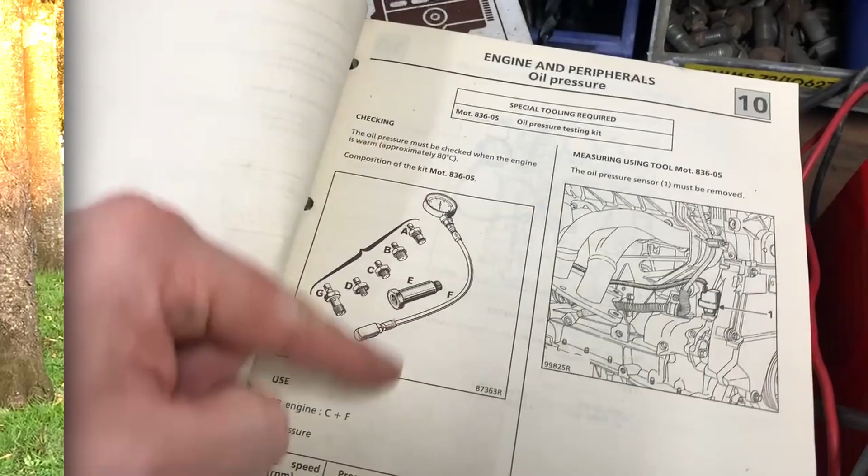Well, this is annoying. I done all that work with the cylinder head, and it was all looking good. The oil pressure was fine until it got up over 100 degrees coolant temperature, which I don't know what the oil would be then, might be a little bit higher after a good while running. And the oil light flicked back on when it was back down at idle, so no better off with that cylinder head, unfortunately. Which is really annoying, because now I just feel like scrapping this car.

However, I'm lucky I didn't film yesterday when that happened, because I was in a right paddy. I did get some video footage of the light just to record it really happening. But I was mega unhappy about it, and yeah, I didn't film anything because I was just sulking.

But overnight, I've had a bit of time to think, and after having a chat with a few people on cliosport.net, quite handy people over there, really know their stuff, particularly when it comes to the F4R, which is the newer version of the F7R that I've got. And they mentioned the oil squirt jets often stick on the F4. So I thought I'd check the oil squirt jets on my engine, being as it's the only thing on this engine now that hasn't been changed. It's simply the only thing left that it could be.

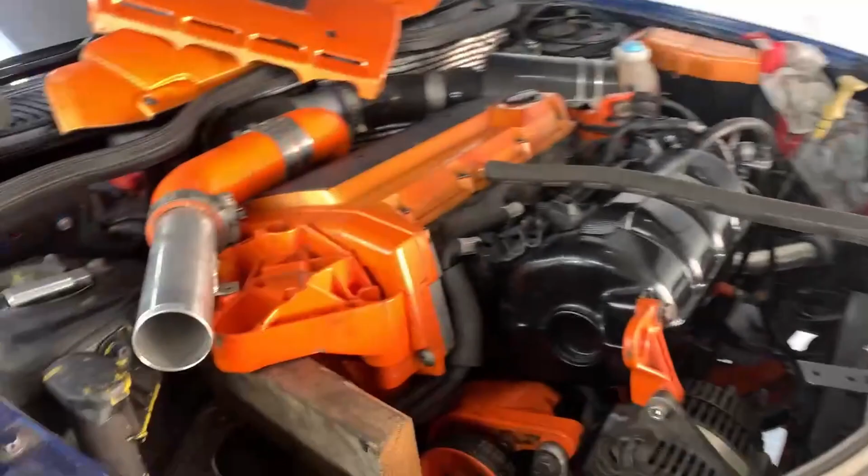So that proves that they are valves. So guess what I've just been doing for the last 2 hours? Let me show you. Here is the engine, propped up with a bit of wood because I need it up higher.

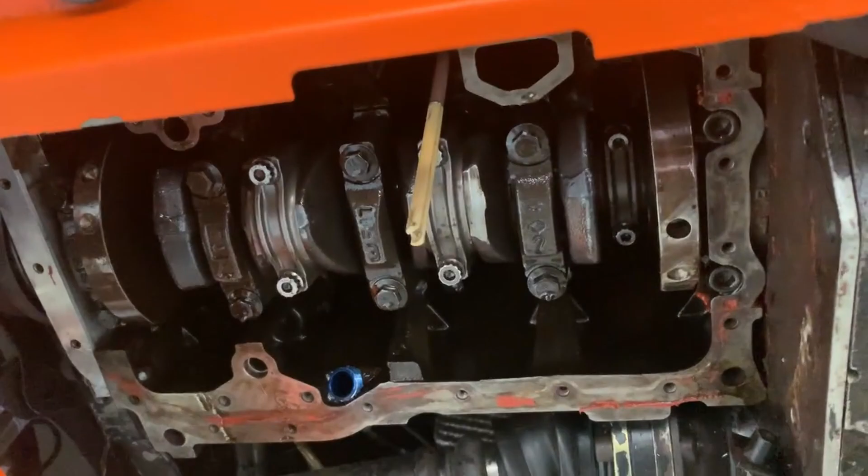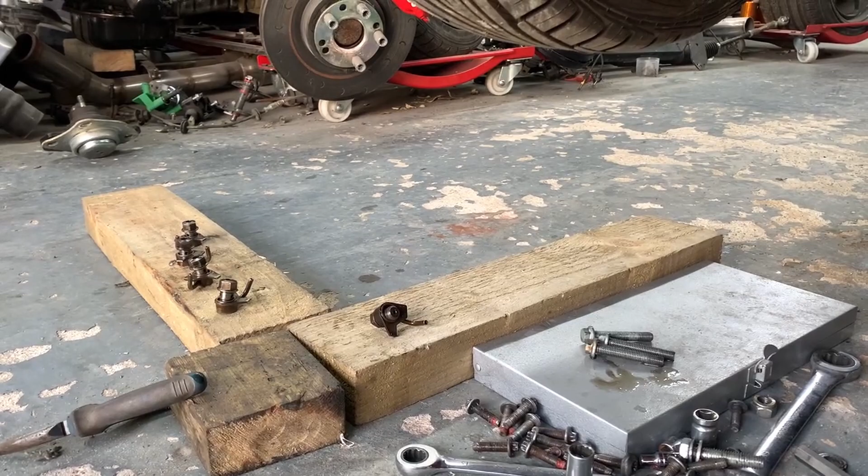Because underneath we've got the sump off, and I've actually taken all 4 of the under piston squirt jets out. That's the spare one from the spare block. And what I found is basically my problem. So, and don't do this, it's minging.

Here is the oil squirt jet off the engine that had good oil pressure. Yuck. And here is an oil squirt jet off the problematic engine. So, there's my problem.

Ew. And 3 out of 4 of those jets on the problematic engine were like that. So, yeah, it's safe to say I think I found my massive oil leak causing my low oil pressure.

So what I'm going to do, I think, is put the 4 good ones, or supposedly good ones. I'm going to find 4 good ones, basically, and put them in this one, seal it all back up, and see how it goes. Fingers crossed, this is the last time I strip this engine apart.

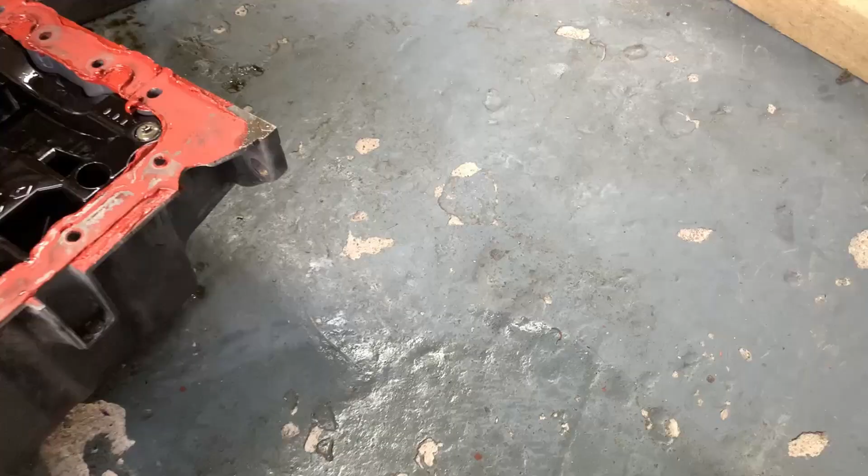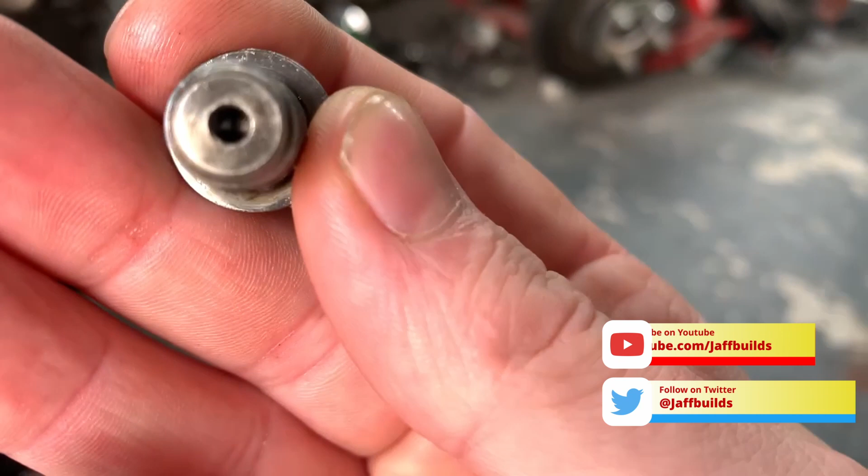Taking a closer look at these jets, or at least the banjo. So there's the jets. These are the banjo that goes through it. And inside, it's really difficult to see. Can you see that there's a piece of metal? I'll put something on the screen so you can see it. There's a piece of metal in there, holding it open, I think. So that would be the issue.

Right, that change of oil squirter jets seems to have done the trick, at least enough to keep the oil pressure from dropping low enough to put the light on, which is the only metric I can really go by at the moment. But what I'm going to do now is start it up, get it warm, as warm as I can.

I think about 103, 105 degrees coolant temperature, because that's when it started getting upset with me last time. So if we go up to about 105, get the fan to come on so it cools it back down. It's pretty good at regulating the temperature, so it'll go up to 105 and then drop all the way back down to about 85, or even lower, depends what I set the fan to go off at. But it's quite good at regulating the temperature, so the coolant system seems to be working properly, and that is cooling the oil down enough to keep it viscous enough, I guess. So yeah, I'm going to start it up.

I've got the F7R manual from Renault in the garage, up in the corner somewhere. But I think in there it says something like 2,500 RPM, you should get 2 bar of oil pressure. I've got the internal gauge hooked up, I've got the mechanical gauge hooked up to the front. So we'll set it up at 2,500 or 2,000, whatever the book says. Check what the oil pressure is. If it's good as far as the book goes, it's good as far as I'm concerned. So we'll just start it up now and see how it goes.

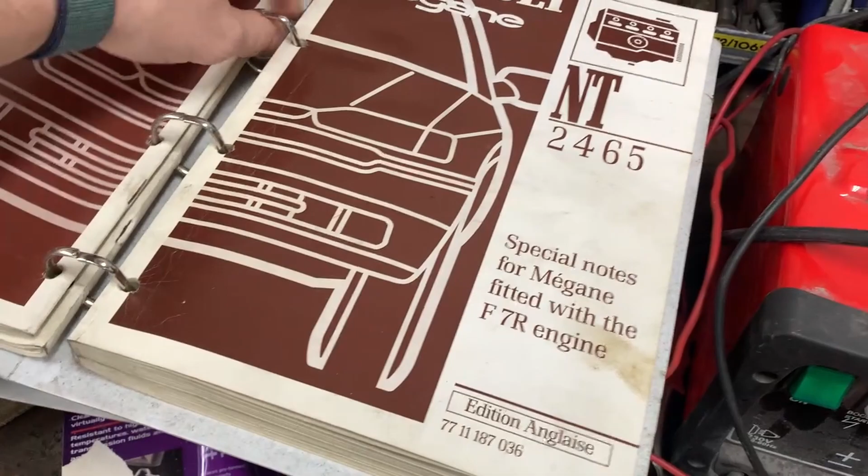Right, here they are. I got them from the corner over there. Here's the official Megane documents from Renault. I don't have an F8Q turbo diesel engine, I do not have driver's seat memory, but I do have special notes for Megane fitted with the F7R engine. So this is the one I'm interested in, and here's my bookmark.

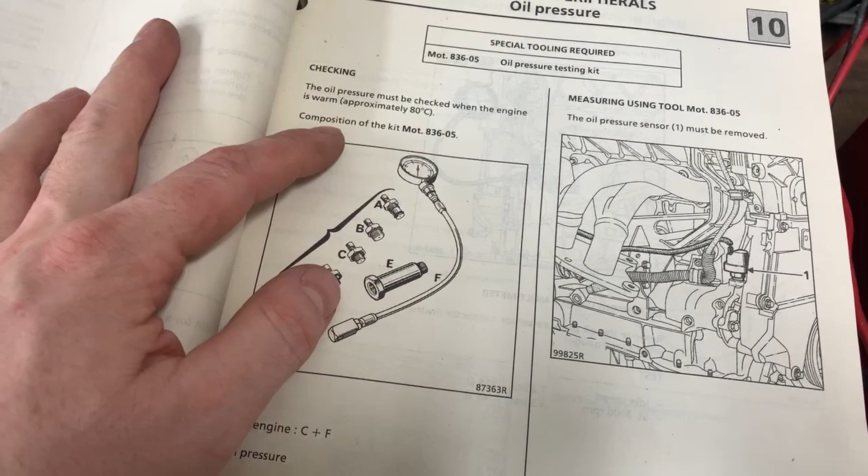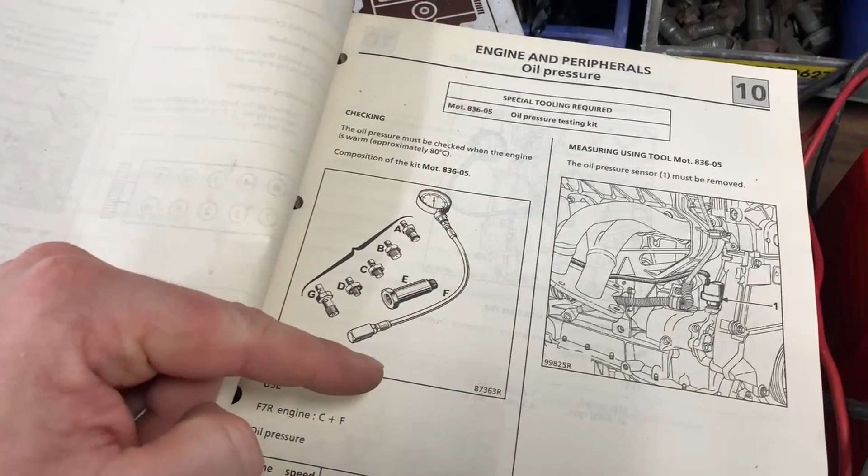Here's what it says about oil pressure testing. Oil pressure must be checked when the engine is warm, approximately 80 degrees. Well, my oil temperature is like about 95, so it's above this. So if the pressure is lower, then we're still okay-ish, still not ideal though. It says at idle speed we should have 1.2 bar.

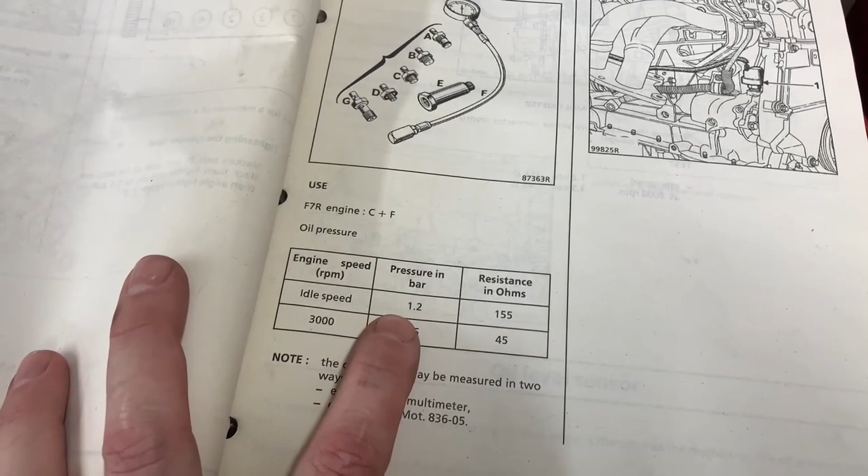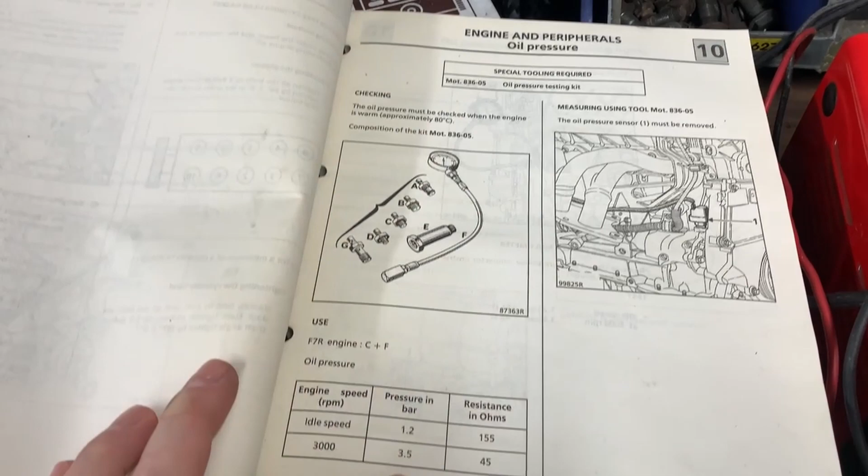I think I'm getting just over 1 bar. So it's close, kind of works out actually if we're at 80 degrees and I'm at 95. So if we're at 80 degrees it should be 1.2, and I'm at 95 and I've got a little bit less. That would make sense. And then at 3,000 RPM it should be 3.5 bar in pressure, and I think I'm only at 3.

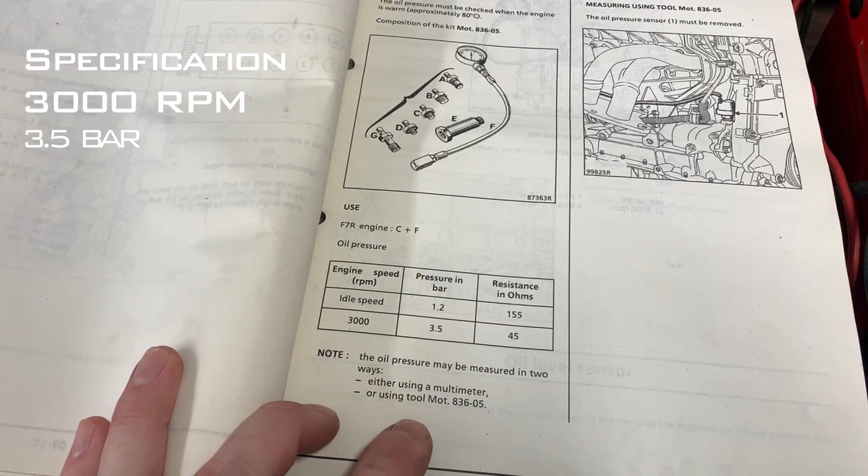So let's find out. Let's start it up, get it warm, see what we're looking at.

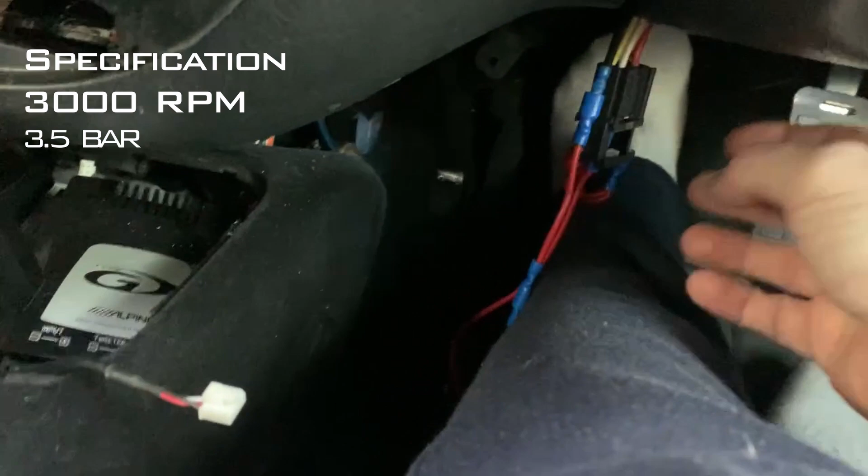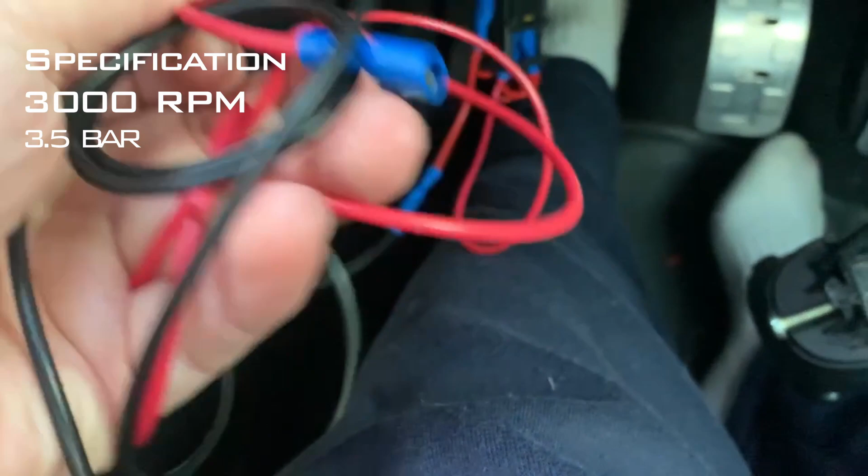The Megane is nice and easy to hotwire. Don't think I can do it with one hand though. There's ignition, and then I've got to put these two wires together. There they are. Ready? Oh, she didn't like that.

There she goes. Never happy when it's cold, but that's what a map does.

Okay, I don't know why I left this video off. I'd done all this work. I had to stop doing this work because I had to fix the Mercedes, which is in for remedial repairs. So I don't know what I've actually got with this video. The start of this episode was filmed probably about 6 to 8 weeks ago by now, so we're 6 to 8 weeks in the future.

And I've got some stuff to do. So I haven't been able to do the... oh god, I nearly said focus then... I haven't been able to do the Megane in the garage, so it's all had to be done outside because that thing is in the way.

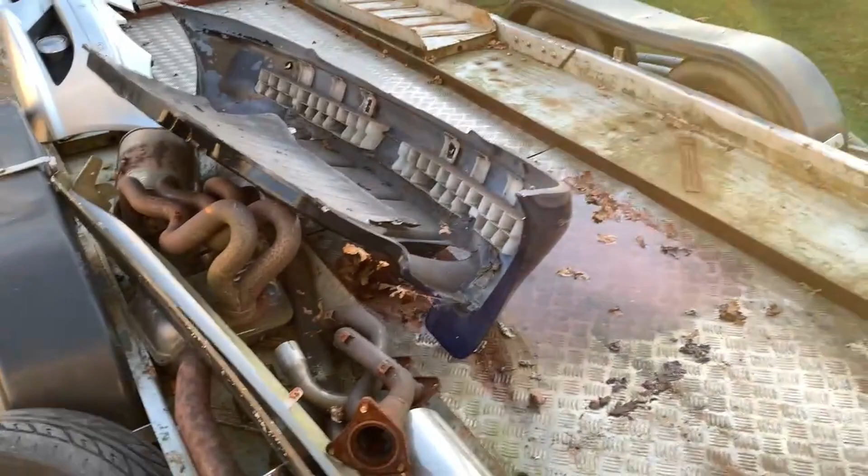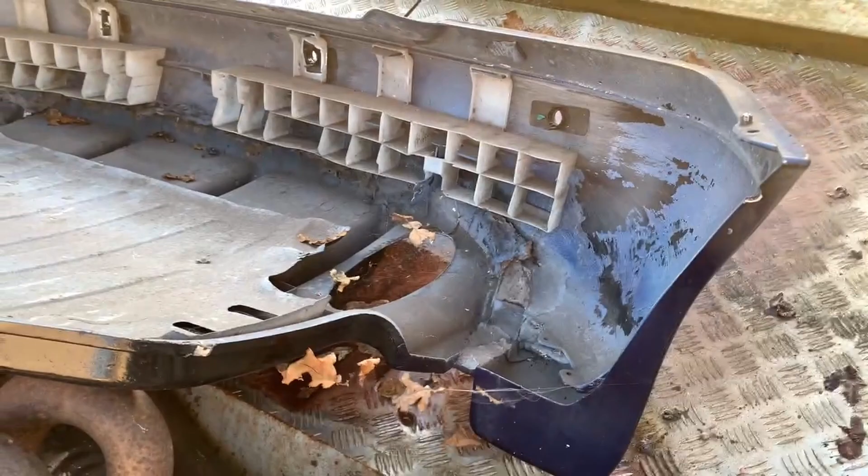I've got the bumper here for the Megane that needs sorting. I'm not going to be able to show you, but basically I've done a really poor job at fixing the diffuser to the bumper, so we're going to copy what I did on the Focus with this bumper at some point. In the meantime, spider's webs, get away. Notice the crack on the filler and fiberglass that I used. Not very good, so we'll redo that at some point.

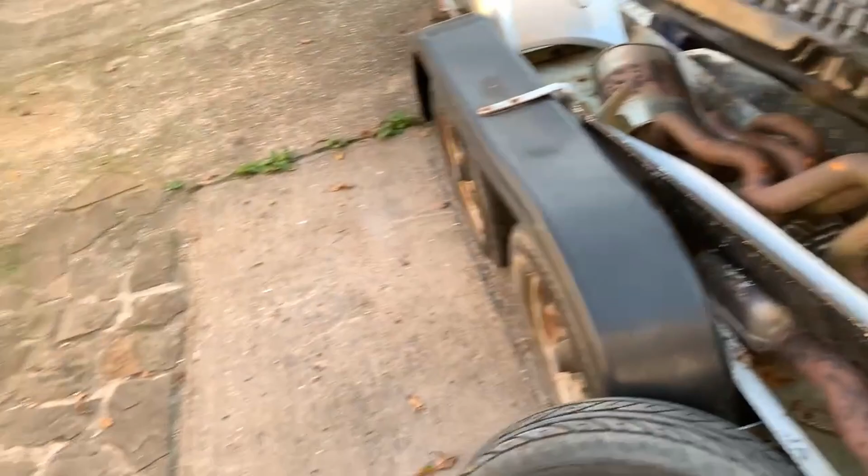Anyway, let's walk to the front where the Megane lives. So, past the Purple Peril, the Daily, and here she is. She lives. Let's pop the bonnet.

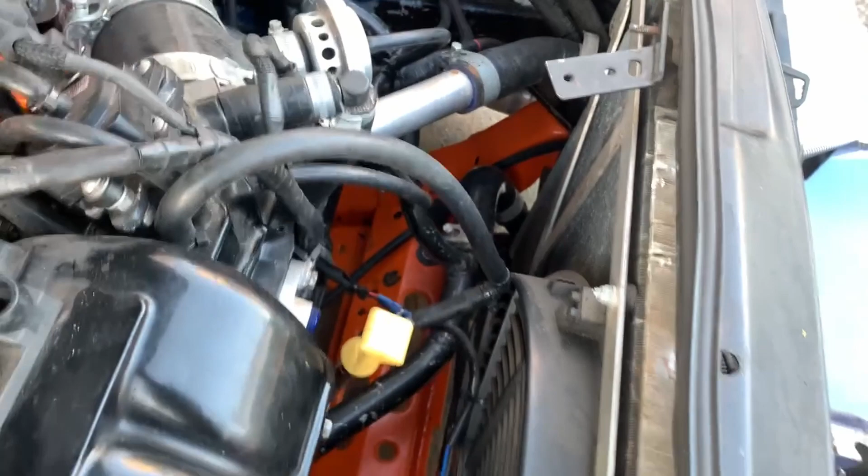So it's all looking pretty good under here. There's one small leak from the radiator hose. I think it's this one down here that's leaking, so we need to tighten that up. I'm not sure if the radiator is actually gone as well, but we'll see. I don't think it is, but it does leave a little puddle on the floor after a certain amount of time, right about there.

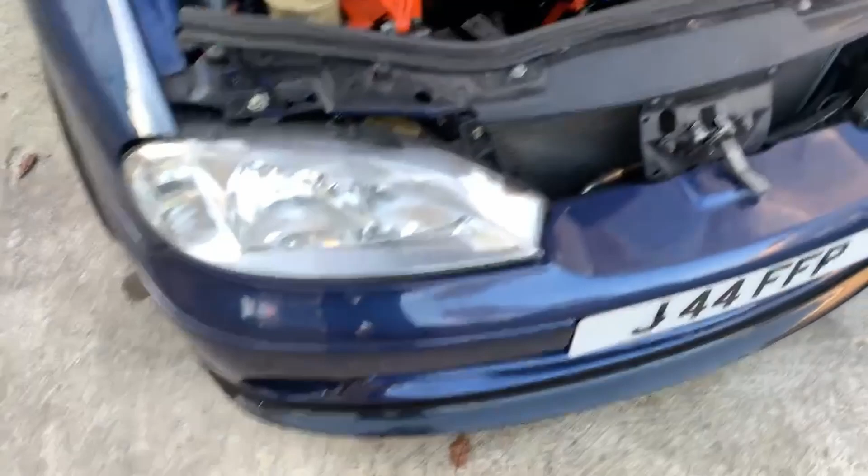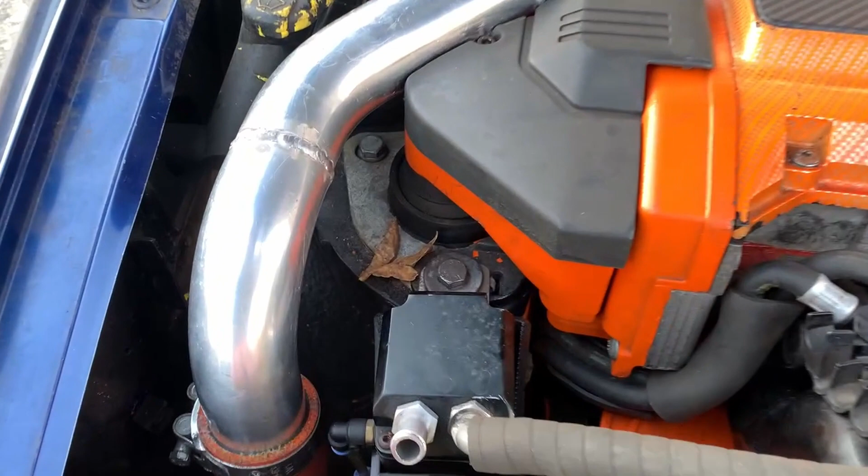I remade this pipe, so that's the boost pipe coming out of the turbo, down there goes into the front of the intercooler, yeah, so I remade that. I made a bracket for the power steering reservoir, but the heat of the engine bay has warped my 3D printed piece, so we're gonna have to make it out of something else.

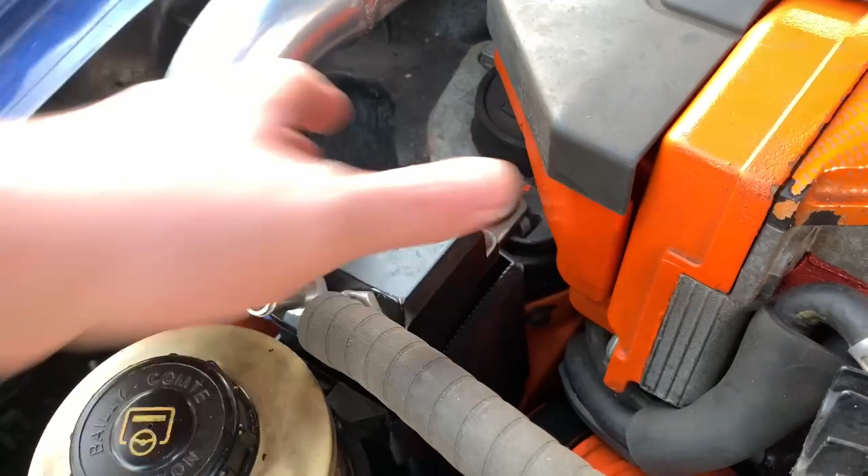Yeah, obviously PLA isn't good enough because it just warps, so we're gonna have to make it out of ABS, I think. But this actually fits quite nice when it clips in. Anyway, close that in the car.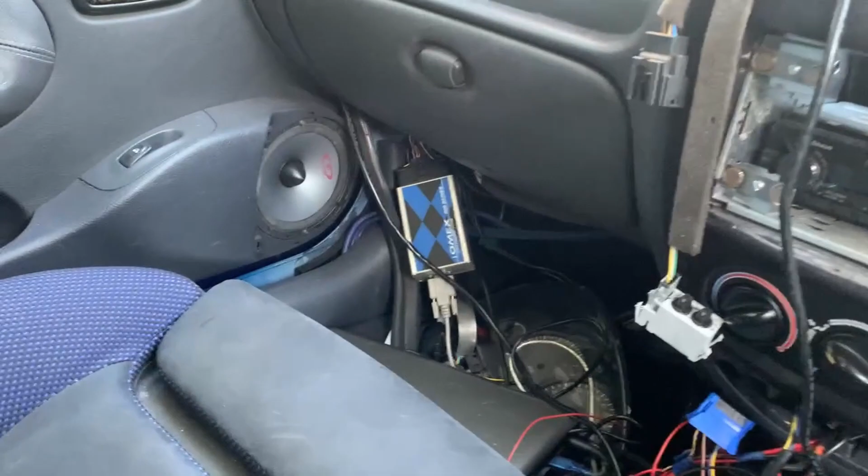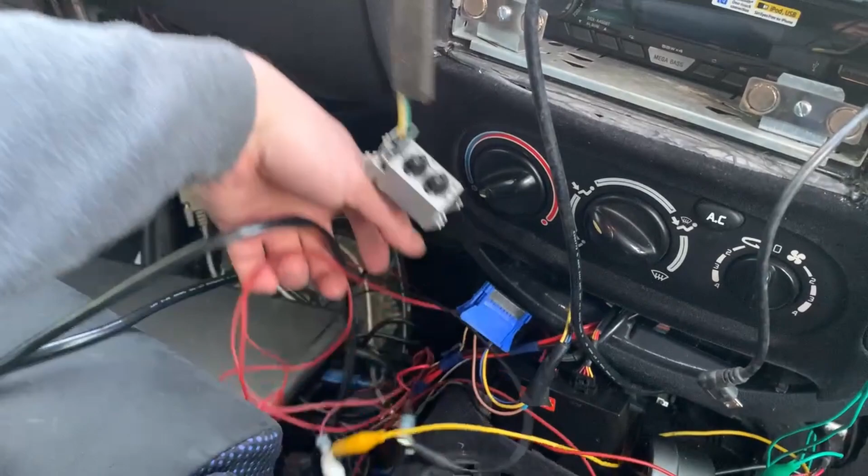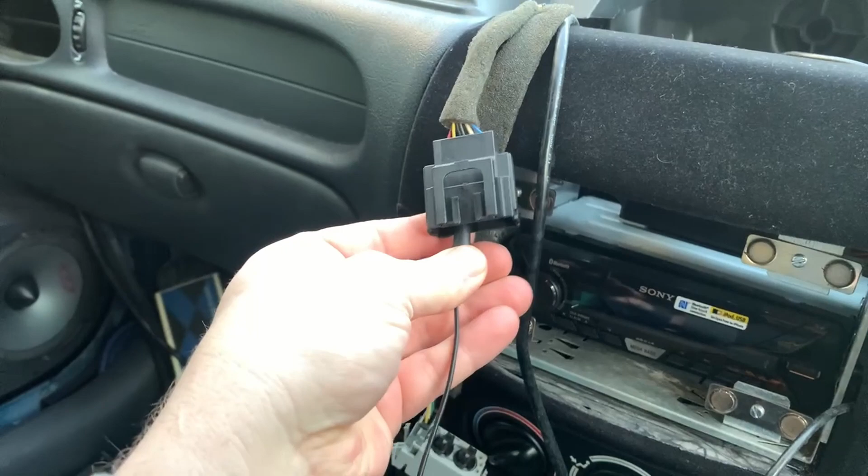So what I tend to do is get the fuel ratio gauge out, plug it in. I've literally got a few plugs here somewhere. Where are we? This black one goes in. It's really hard doing it one-handed. That black one goes in there, and the red one around there somewhere. Too many red ones. There it is. This red one goes on the end one.

Just so that we've got a reading. So obviously, because the car isn't on at the moment, it's not reading anything. I need to tidy all this up, but we'll get to that at some point. I also need to sort out a starter for it because currently I'm hot wiring it.

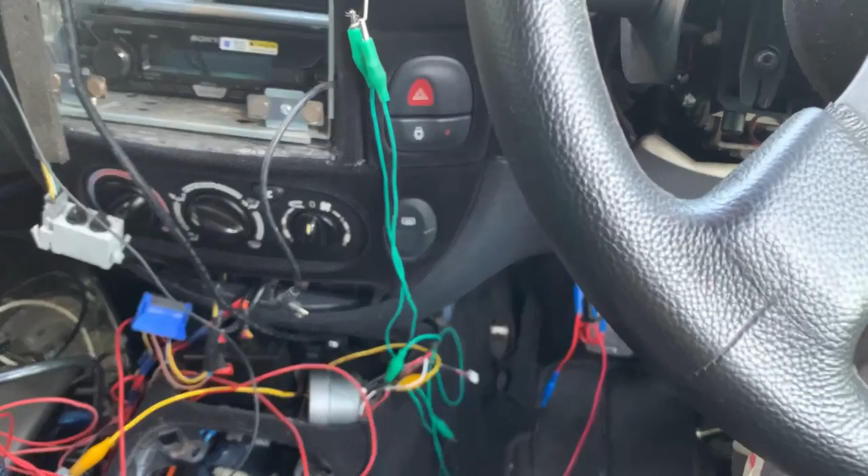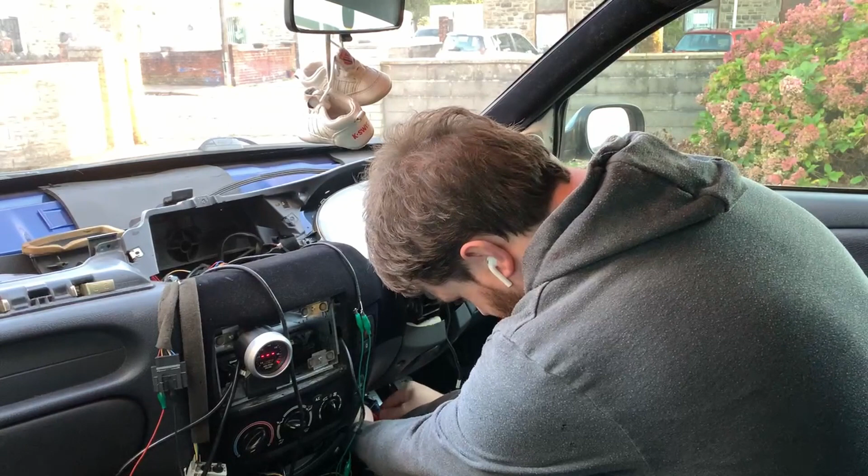So we'll sort out a starter for it before it goes for a map. But I think for now we can start it up and just take it up and down the road to see how it behaves. Right, time to hot wire the thing. Fuel pump comes on. It should start fairly simply.

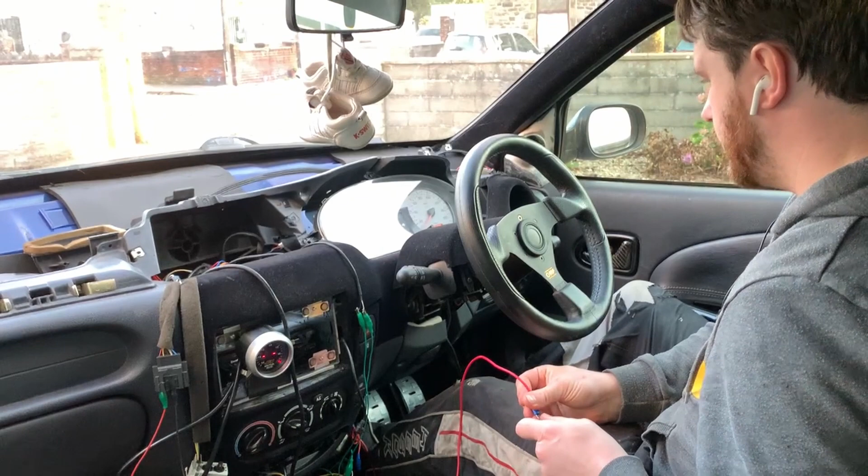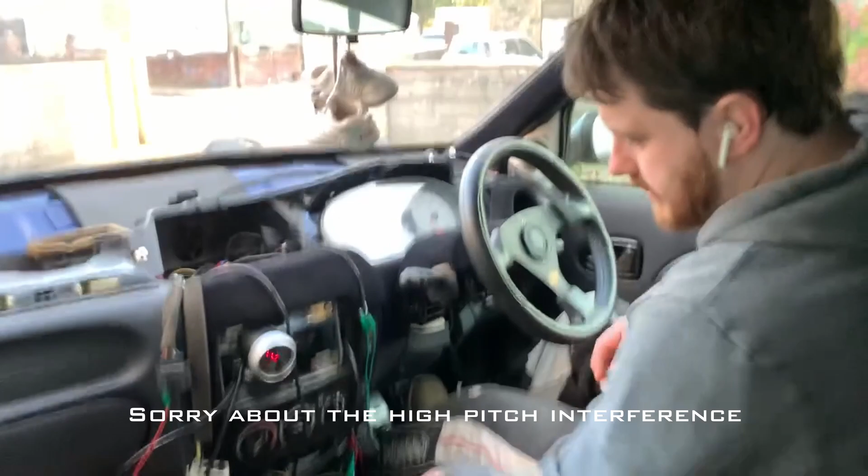Oh, not very happy with that. Give it a bit of gas. There it goes. So it should. Handbrake light off, all good. Clutch works. You can keep an eye on that for me because I can't see it. Oh, don't die.

Need to sort the idle out. But it should. Neighbours like it.

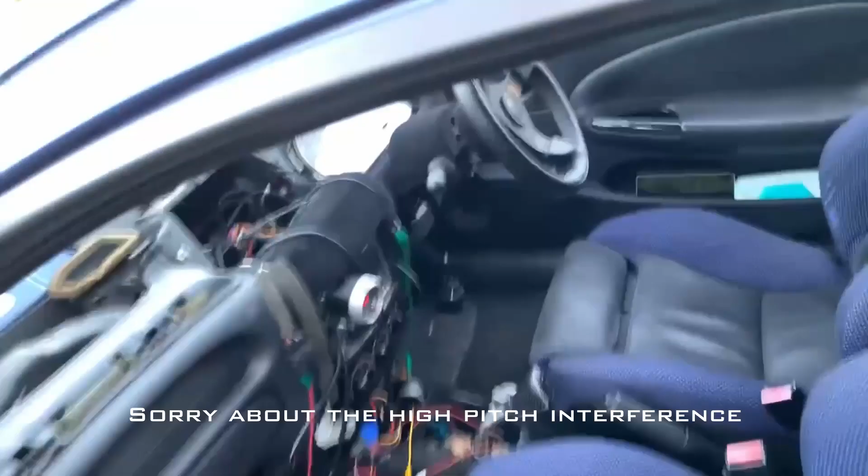Oh, the brakes work. So, now that it's out and about, we can still see it. It's missing a bumper still, but it continues to run. I've got some paint correction I need to do there, and yeah, it looks pretty good.

Let's set you back up. Right, hopefully you'll stay there. It's actually quite smooth.

Okay, well, some of the video dropped out there because my mount fell off, but we'll arrange that properly next time.

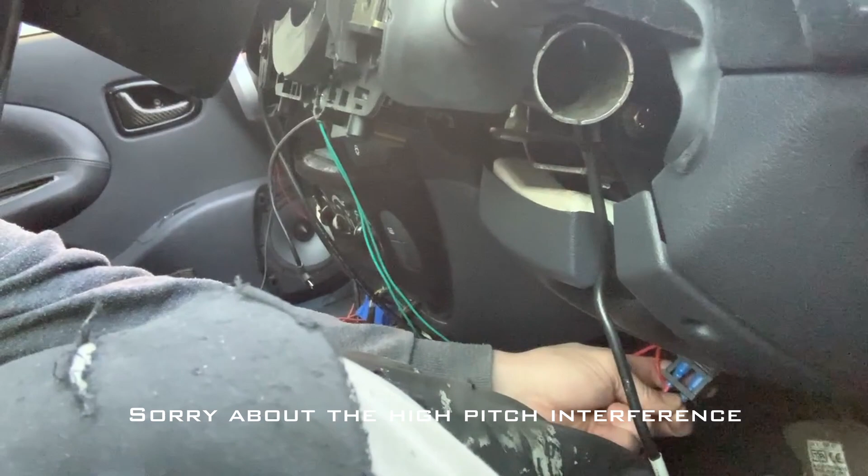That's probably next on the list after I've cleaned up everything in here. So I've got a couple of jobs left to do really. I've got to tidy up in here, and I've got to get myself a start button because I can't, hold on, let's turn it off.

So it's, yeah, I need to sort out an ignition for it and tidy up in here, get the rear bumper on so it's MOT worthy, and then I think I'm going to trailer it to the mapping place. I don't know who's going to map it yet. Hopefully I can find somebody, and get it mapped on the dyno properly so that it doesn't kill itself, and then we'll take it for MOT, and then I'll be able to drive it around and get some mileage under its belt, because currently it's only done 100 miles with this engine and this gearbox.

Speaking of the gearbox, I'm sure lots of you have heard it. It sounds horrendous. Something's obviously gone wrong in it, so I might buy a new one anyway and do a quick gearbox change on this, because with the clutch in, the noise disappears and the engine sounds sweet as. So I'm convinced it's not the engine. Don't worry, it's not rod knock. Rodney is not knocking. It's definitely the gearbox. Something's gone wrong with the gearbox.

The car I got that box out of was in an accident, so it's quite possible that it's just knackered anyway. But I think they're fairly cheap to get hold of now, so I'll probably either buy a new box or pull that one out, get it refurbed, and put it back in. That might be a better option, not sure. And yeah, take it for some mapping.